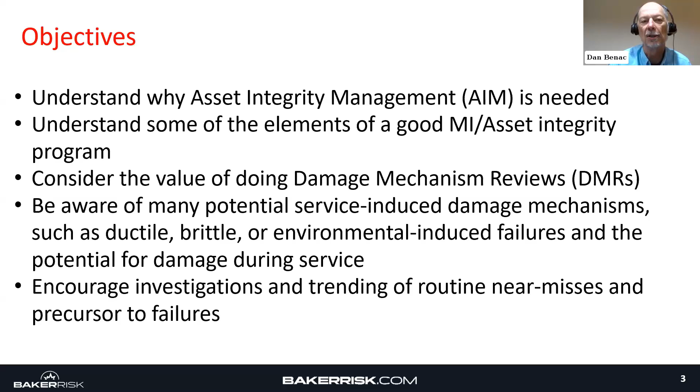We want to discuss specifically some of the elements of a good mechanical integrity or asset integrity program. We've decided to talk about damage mechanism reviews. Both Mike and I have been involved in that, and we think that's an important part of a good asset integrity program. Related to that, we're going to talk at a high level about some of the potential damage mechanisms that could limit the lifetime of your equipment, which you're very concerned about. And then we want to propose a best practice that we have observed from some of our customers that we work with on looking at investigations.

So those are our objectives, but here again is some of the outline of what we will be discussing. We'll talk about the importance again, who your presenters are, a case history to whet our appetite, and do some comparing and contrasting of PSM, process safety management, mechanical integrity, and an asset integrity program.

And those key elements of that, as I mentioned, damage mechanism reviews. Some of you may have been familiar with that. We want to share what we consider a shining star of an application of an asset integrity program that we have been leading for 3 years now globally, and that is for the ammonia and fertilizer joint industry program. Mike's going to go into the importance of inspection programs, because that's something dear to his heart. And then, as I mentioned, we'll talk about a best practice about trending near misses and failures.

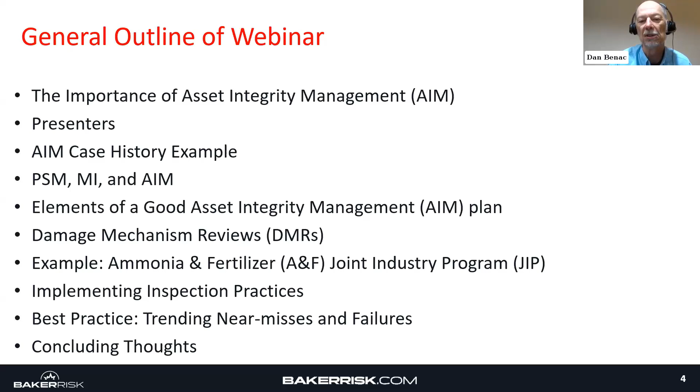A little bit about myself. From the video, you might recognize that I'm not a young engineer anymore. I have over 40 years of experience working in many industries. Started my career actually working in the refining industry, working onshore, offshore, in the plant. Cut my teeth on doing investigations for refineries and for production facilities, been in the North Sea. Through those experiences, I have become a subject matter expert in the area of corrosion and materials evaluation.

I'm a certified fire and explosion investigator, as well as a professional engineer. Have worked around the world dealing with mechanical integrity issues abroad, because things do happen, and we as a company have been sought out for that, and I've been honored to participate in that, and have been involved in many committee works, and again, I'm the subject matter expert for the ammonia and fertilizer joint industry program. That's just a little bit about me. I also oversee our materials lab here in San Antonio, Texas, and have a great group of experts that I work with. So now, Mike, why don't you introduce yourself?

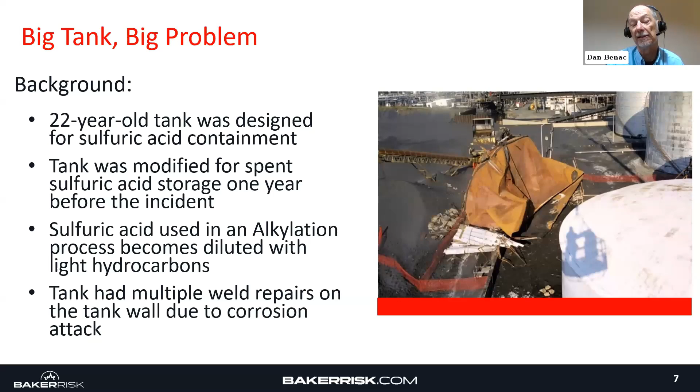In addition, multiple repair welds had been done, not only at the base of the tank, but also on the side and even on the roof of the tank. On the day of this particular incident, inert gas was flowing in the tank because there was some repair work going on in the vicinity.

This is a very large tank farm. You can see in this picture some of the other tanks. There were actually 6 tanks in this tank farm. So there was hot work activity going on above this particular tank.

And the failed tank was connected to another tank. That's important because there was natural flow that had occurred allowing air to go into this particular sulfuric acid tank, unbeknownst to the hot workers at the time.

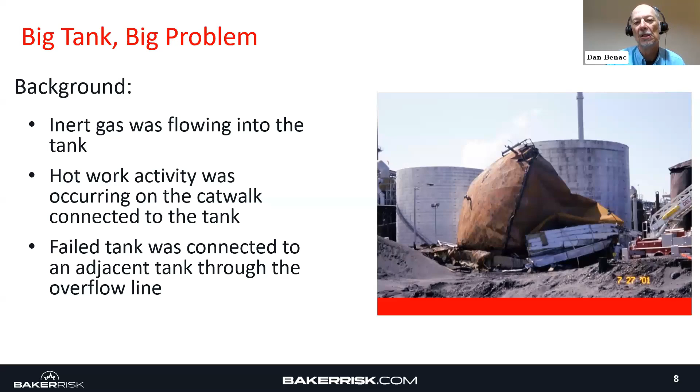As they were doing work, unfortunately, a very tragic fatal situation occurred where an explosion, what we would call a deflagration, occurred inside the tank, rattled the tank, and literally lifted this tank off its base into the air and threw it on its side. This was a view I actually took from a lift, photographing this particular tank.

What we determined in our investigation, a very complex investigation that took many years before it finally all settled, but at a very high level, air had entered into the tank. You had spent sulfuric acid, so hydrocarbon vapors were present. And in this vapor space, there was a fuel-air mixture.

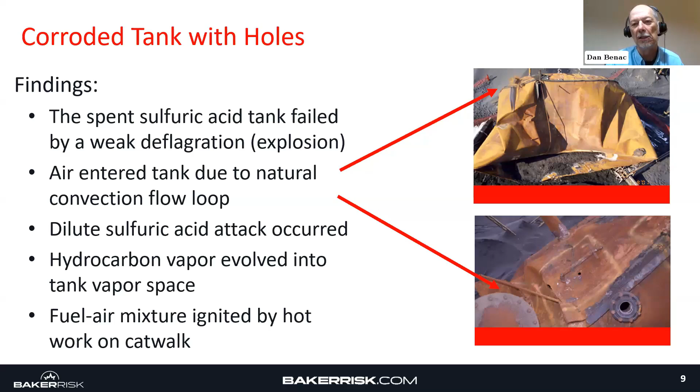A spark from the hot work had thrown itself into the tank because there were holes on top of this tank. Not only were there holes on top, but as I mentioned, you can see in the lower picture some of those holes that were on top of the tank. So it was just a spark basically that got in there, and it caused that failure to occur.

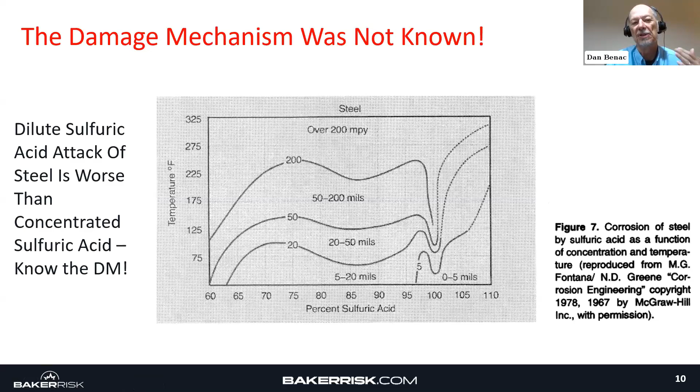So the reality of the situation is this tank actually had rainwater get in there, and the sulfuric acid became more diluted than concentrated, and therefore the corrosion rate was much higher. That was a contributor to some of the observed corrosion. The point being, you have to understand potential damage mechanisms to fully prevent something from happening.

So at a very high level, here are a few things you could call lessons learned related to asset integrity considerations. One, this tank was designed for sulfuric acid, not for spent sulfuric acid. Therefore, it was not a frangible roof design. What that means is a frangible roof will intentionally fail if the pressures get too high.

Well, the pressures did get high, but because the roof was a solid, non-frangible design, it basically lifted the tank off the ground. Otherwise, the tank would have just failed at the top.

This particular tank did not have a robust integrity program, obvious from the corrosion that was evident. There were inspections that were done, but they were inadequate because of corrosion that actually occurred under insulation. Many of you are probably familiar with CUI, corrosion under insulation. As I mentioned, the damage mechanism of diluted sulfuric acid was not fully understood. And although they had a purge system, the purge was inadequate. So you could say, well, I checked that box, we purged it.

Well, the purge was not adequate, obviously, because it lit off and it was in the flammable range. In the hot work, although there were hot work orders that were signed off, they were not fully adhered to, and some of the dangerous situations were not fully accounted for.

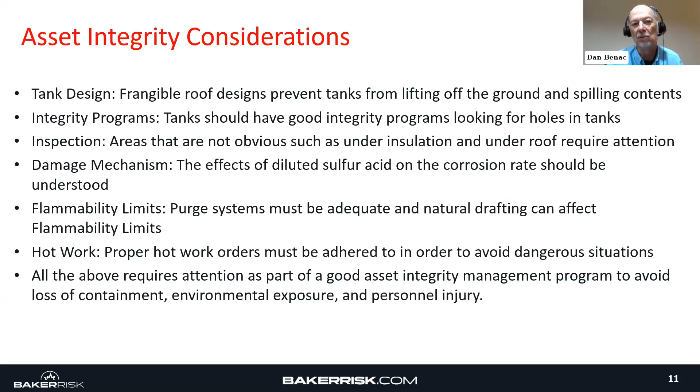So just as an example of a storage tank, although there are many, many things that could have been addressed, it just reinforces the necessity of having a good asset integrity program.

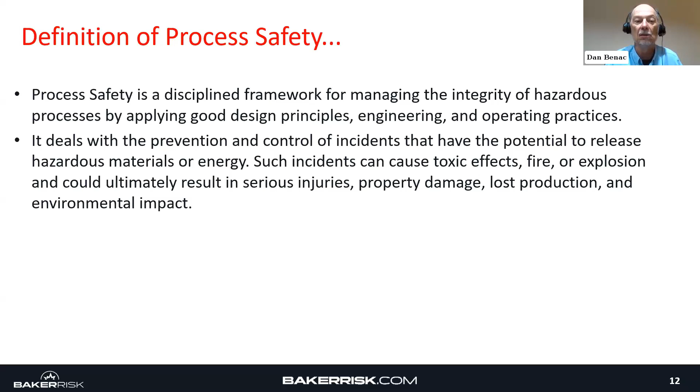Many of you here on this webinar have a process safety background, and just to put us all on the same page, it's a disciplined framework of looking at the hazards and applying good designs, good engineering practices, and operating practices, to minimize the hazards that can occur with toxics, fires, explosions, potential injuries, and also the loss of production, which is very costly to many of us.

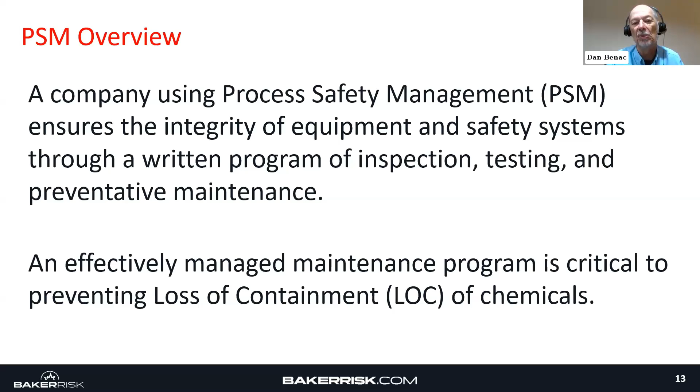It could be a pipe, it could be a vessel, it could be anything, but you want to keep the chemicals basically in your pipe, in your asset. And so that's why you do your asset integrity. It's to have those procedures, to have those controls. We want to keep the contents in the pipe and keep it under control at all times.

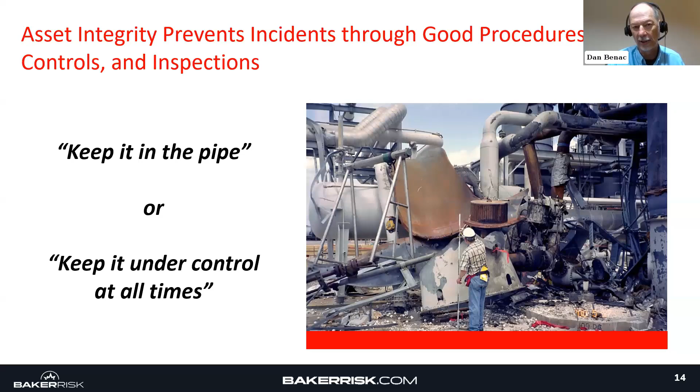What you're seeing is another incident that our team was involved with a few years back, a brittle catastrophic failure. Unfortunately, catastrophic failures like brittle failures have very little warning. And therefore that's why you have to have a good asset integrity program to know what scenarios might cause a brittle fracture. In this particular case, there was a weld that was performed that was a poor quality weld, and under operating conditions of less than a day of operating, it catastrophically failed. So an asset integrity program would be controlling that.

Just to show you some statistics, mechanical failures, if you look at this pie chart, you'll see that a lot of your failures are predominantly, like over 50%, are due to mechanical failures or operation related. In fact, another survey stated that 50% of major losses of containment were primarily due to aging of equipment, due to either erosion, corrosion, or fatigue.

And I would agree with that, having worked with many of the damage mechanisms that can cause concerns, such as fatigue, cyclic loading, higher temperature exposures, corrosion, and sometimes velocity effects. These are all things that are taken into account.

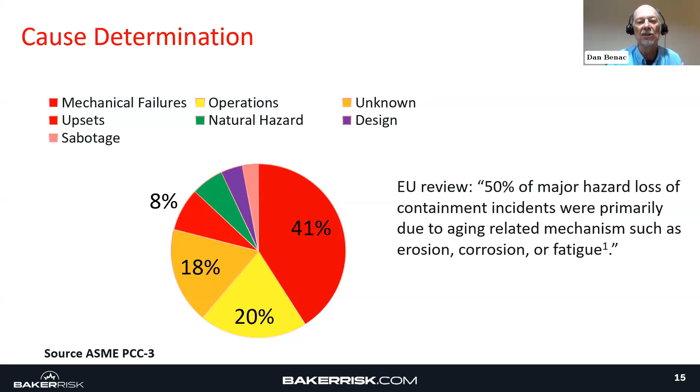Well, in the process safety regulations, both in the UK, in the United States, and now even in Egypt, there are standards and guidelines that are put out there. And those have come because of incidents that have occurred worldwide. It all kind of started in the UK and in the United States in the late 80s, early 90s because of incidents. OSHA in the States created a law referred to as 1910.119.

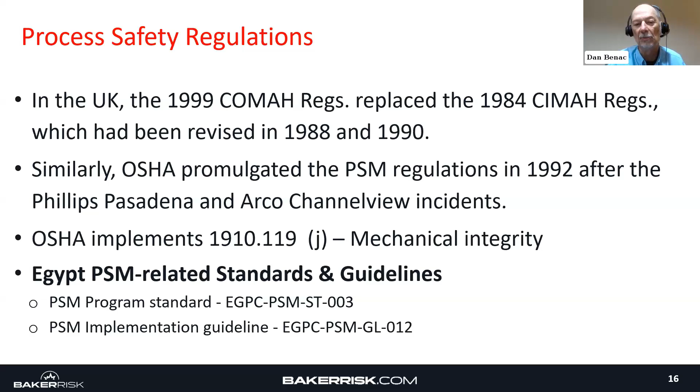Under that was mechanical integrity. And I'm aware and have seen some of the Egypt PSM related standards and guidelines shown here that you are looking at, considering, and trying to implement in some of your plants. So there are the original 1910 elements, which included these 14 elements.

Many of these, in fact, if you think about the incident I just talked about, there were several of those that were not adequate. One, there was a management of change - they changed the tank to a different service. Contractors working had a hot work permit, but it wasn't adequate. Training was an issue. The integrity of the tank, the emergency response, was a factor when the incident occurred. So you can see how all of these things really do play into a good asset integrity program.

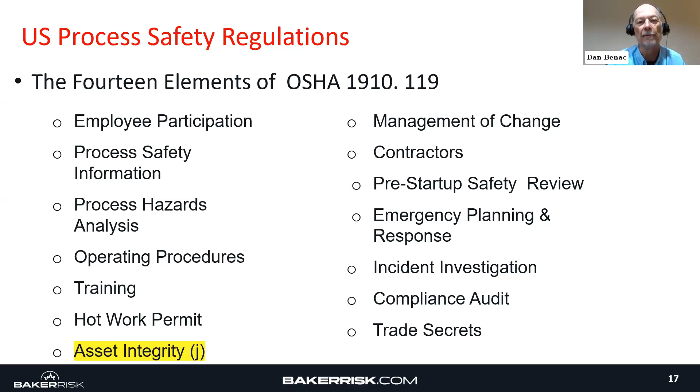Just to emphasize the importance of that in the United States, and this may be a little bit older data, but the important point here is that in the United States it's been recognized that often some of the issues of citations, which means there's been some violation of a procedure, written procedure, training, inspection, or equipment deficiency.

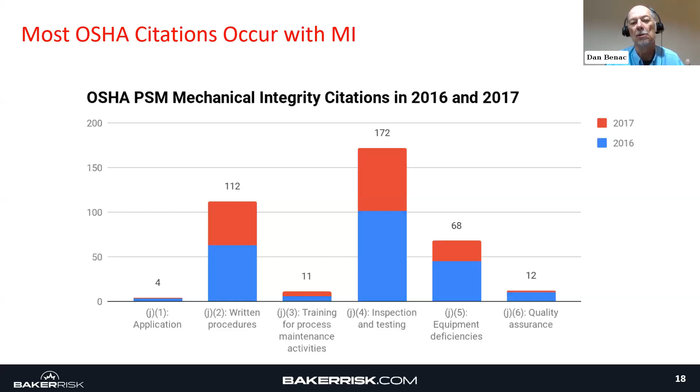A lot of those are citations that go to companies within the US to say you need to do much better, and you will be fined accordingly.

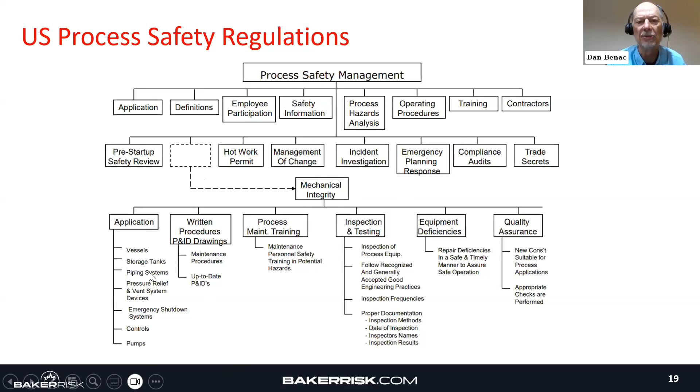This flow diagram might be a little bit busy, but what I want you to see, as I bring my cursor, is this mechanical integrity. Under that are many elements, and that's what we're talking about today. We're not talking about all these others that are important, but we're going to talk about written procedures, inspection programs, some equipment deficiencies, and the applications of those to different types of equipment. Mike will be addressing some of that.

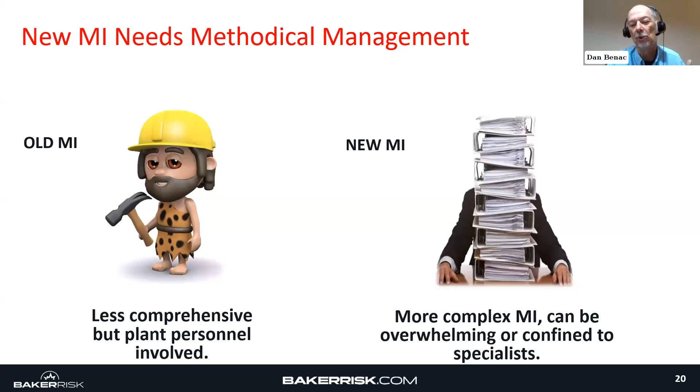Well, if you think about mechanical integrity, it could be kind of overwhelming. I think in earlier days it was probably less comprehensive, not as organized, not as documented. And so now you have all this documentation, which can be overwhelming. But it's very important, and it's very important that that information is passed on to the people who really implement that in your plants. There are many tools out there.

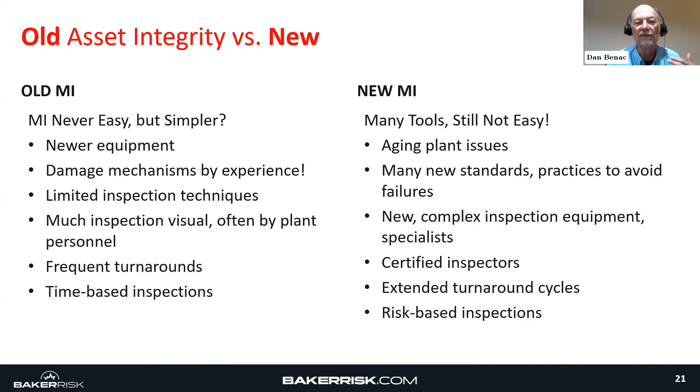It might seem complex, but the main thing is to continue to move forward: looking at your equipment, having the right certified inspectors, doing risk-based inspections. That's more of a newer approach, looking at the higher risk issues rather than just doing fixed equipment inspections. But these are all things that are very important.

Just to build on OSHA, what was also developed is risk-based process safety, which took it to the next level. What that is, is looking more at the hazards and the risks, recognizing that not all hazards and risks are the same. So often when a risk-based approach is taken, it's looking at all the potential hazards and risks, but then prioritizing those risks that could be the greatest hazard or the greatest potential risk for loss of containment.

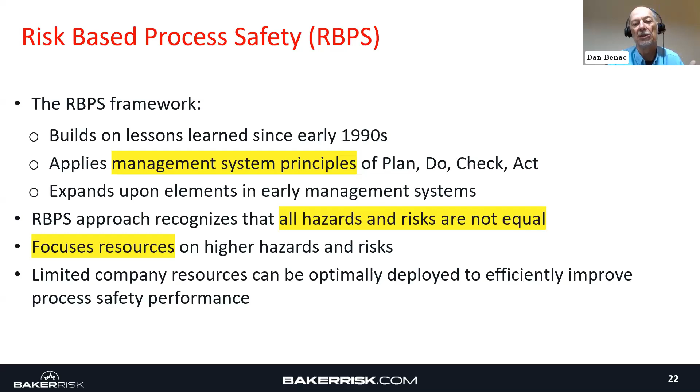And the focus, therefore—because many of you recognize you cannot do everything in a turnaround—you begin to focus on those that are higher. And so it becomes a prioritization methodology, just so you can accomplish those higher risks and use your resources to the best ability.

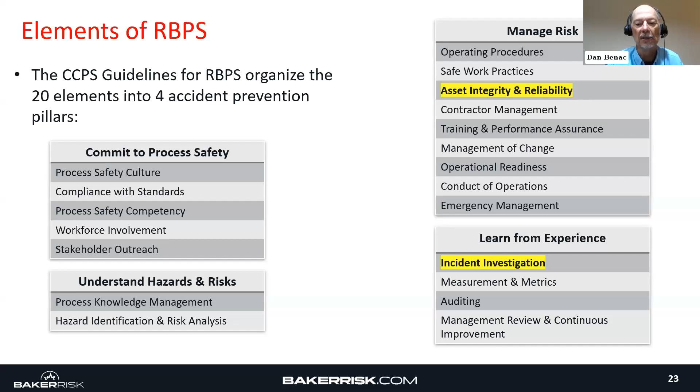So the CCPS, or the risk-based process safety approach, expanded that into four, what they often refer to as pillars, and 20 elements, as you can see here in this listing. The pillars would be: a commitment to your process safety, understanding the hazards and risks, and managing the risk—which is that aspect of asset integrity that is part of that. And then learning from experience. I've highlighted asset integrity and learning from experience under incident investigations, because later we're going to talk about a best practice related to investigating those things that occur in your plants.

Again, now let's focus on the asset integrity, often referred to as AIM. Again, we are looking at your equipment—it could be fixed equipment, it could be rotating equipment, it could even be controls of some of your equipment. But all of that is important to the operation of your plant, and therefore that all fits under your asset integrity program. Early in my career, probably about 20 years ago, I was part of a team that went to...

...the North Sea to look at the asset integrity of multiple programs in place for offshore platforms. It was there that it became very evident of the necessity of that, because of the hazards of offshore platforms, environments, and the corrosion and operations. And so that also applies to our land-based resources and assets too.

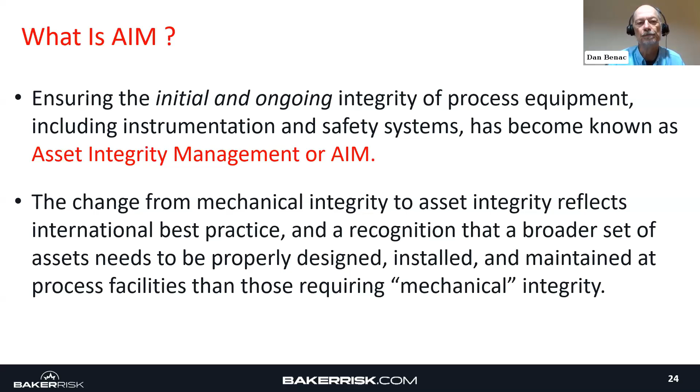So when we're talking about managing risk, integrity, and reliability, we're talking about the design, the installation, and all the activities that ensure keeping the equipment fit for its purpose until the retirement point occurs. Now, we will make a note—at least here in the States, there's a lot of aging equipment.

And it's that aging equipment that presents some challenges, because often equipment may have been designed for 20 or 30 years, and it's actually being used for 40 years. So you have to do those assessments if you're having that old equipment. That does not mean new equipment should not be inspected or part of your program, but the greater risk is with your aging equipment.

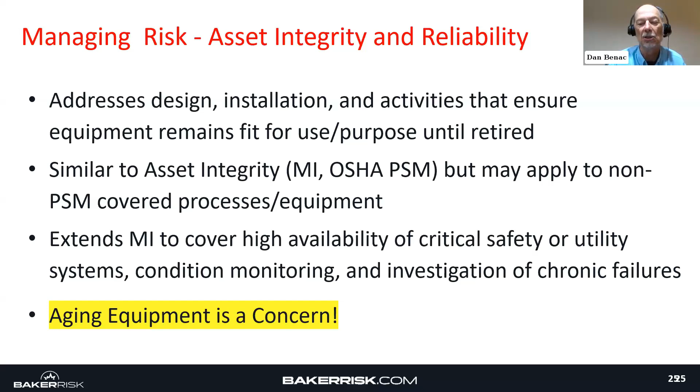We're probably a little bit partial, but we believe mechanical integrity is one of the largest and most important elements of your PSM program, and may even be one of the more expensive ones because of having to put resources into doing those inspections.

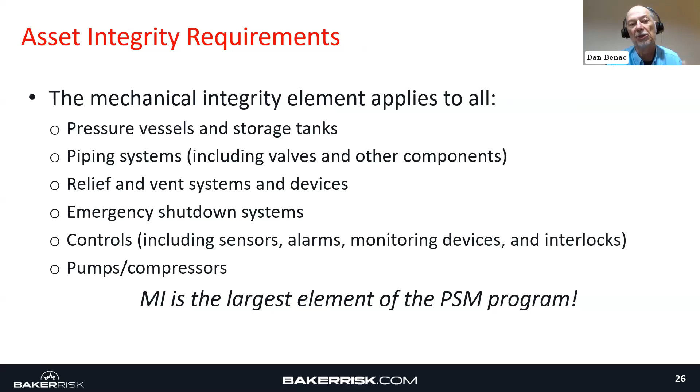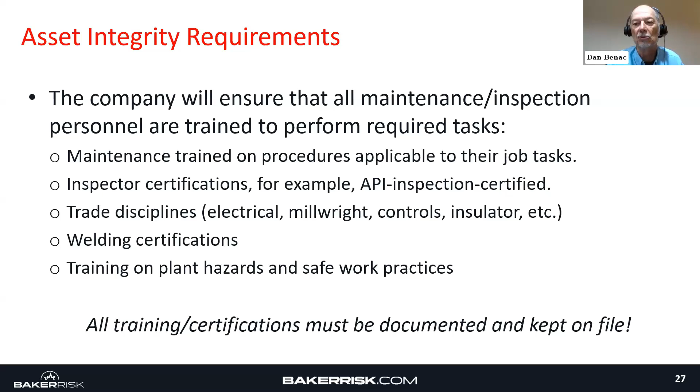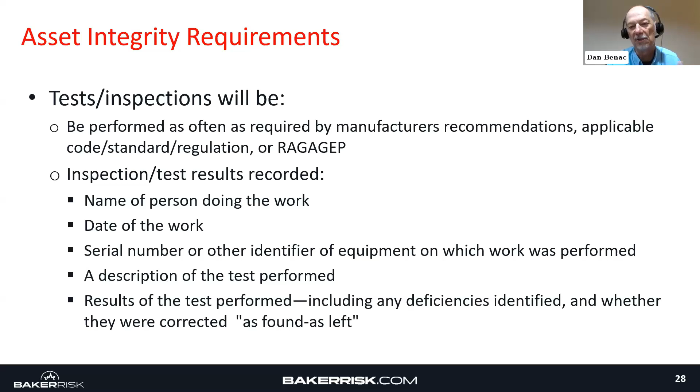Related to testing and inspections, Mike's going to address this further, but it's critical that you have a plan in place, you're meeting the codes and standards and recommended best engineering practices, and you're tracking all of your equipment, so you can point to that heat exchanger or vessel and say: we know when it was inspected, what it was inspected for, and that the person was certified, and therefore we found some deficiencies, and this is the action we took.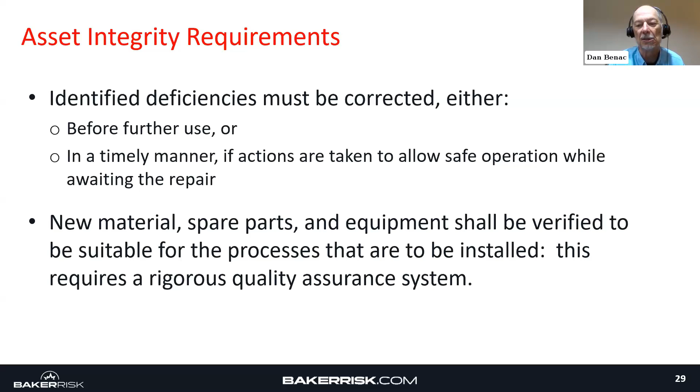Concerning deficiencies, this is a big deal, because if you're going to inspect equipment, you are going to find things. The challenge you face is whether you can address those in a timely manner, for the purposes of allowing safe operations to occur, and whether you have the necessary spare parts or new materials. Like the example I shared earlier, a vessel had a repair that was inadequate, and it resulted in a brittle fracture. So deficiencies have to be addressed in a very appropriate way.

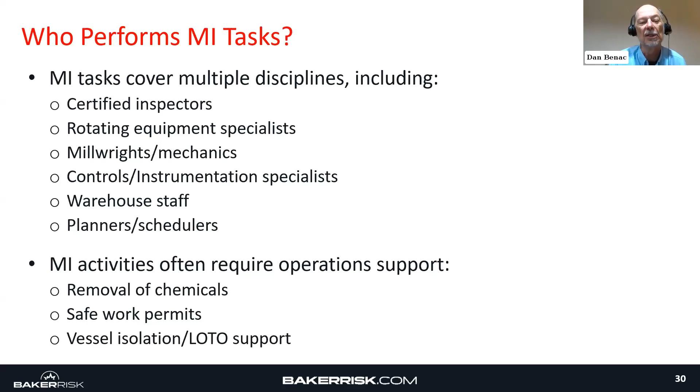There are many people involved in a mechanical integrity program. It starts from the top, from your plant manager or PSM lead, but the implementation goes down through your staff, to the operators, the inspectors, the millwrights, even some of your warehouse staff. Everyone needs to buy into your mechanical integrity program.

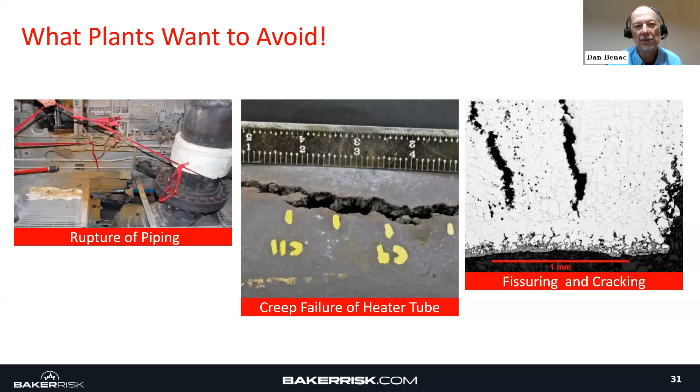I put up some of these pictures because these are things we've seen happen. On the far left, a failure occurred in a stainless steel pipe in a nitric acid plant that resulted in the pipe launching through the roof. Or you have a creep failure of a heater tube, or maybe a radiant tube, or a platformer - those are high temperature issues. And you might even have high temperature hydrogen attack, where you get fissuring or cracking, as shown on the far right.

These are all things that can happen, and can be avoided. As we think about those failure mechanisms, what we're really talking about is whether you have the right controls in place to manage your risk. A good asset integrity program will know the likelihood of failure and the hazard or consequences of failure, so the objective of your program is to control and manage those risks to prevent those things from happening. My experience has been that it's often the unknown that gets us, because we're either not informed or we don't understand all the implications of what could happen.

But once we understand those drivers for mechanisms that can degrade our equipment, we can inspect for it and reduce the risk. That leads into the next topic, which Mike is now going to take over. Thanks, Dan.

We've gone through a lot of the results of not having a comprehensive asset integrity management program. Dan showed you some of the failures that occurred, and we're going to try to show you now tools that will help you address that.

We just saw the 5x5 risk scenario - I think either a 5x5 or 6x6 matrix is the key and cornerstone of most mechanical integrity programs. Those who operate in the high red region are subject to more incidents than those who operate in the lower left-hand corner, in the green region, which means you're basically in a controllable area where your likelihood is low, and if there is a failure, your consequence is low. You want to try to live in the green area, not the red area.

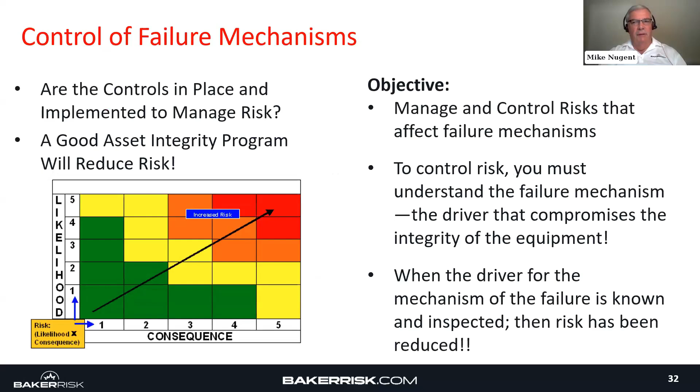A few ways to start doing this. The cornerstone, I believe, of an asset integrity program for fixed equipment is a damage mechanism review.

These are the foundation of the asset integrity plans. They try to go through equipment in a systematic program for addressing life-limiting and compromising damage mechanisms, both unaddressed and known with the equipment, and hopefully you'll look to see what unaddressed or unknown damage mechanisms may have occurred in other similar units, either at your facility or other facilities, that can cause a loss in production.

I've been fortunate enough to work in plants, as Dan had mentioned, aging equipment. The refinery I spent 25 years working in was built in 1908, so obviously we still had some equipment in service since then. Some of the utilities, I think the oldest vessel I worked on was from 1932. Some of the fixed equipment was there, so at that time the equipment was well over 80 years old.

Having said that, in the utility industry I worked in New York City, we had operating equipment still in service from 1888. So again, the refinery I worked in was relatively young compared to the utility, where we had wooden gas pipes and copper steam pipes. All those are still in service. We try to remove them.

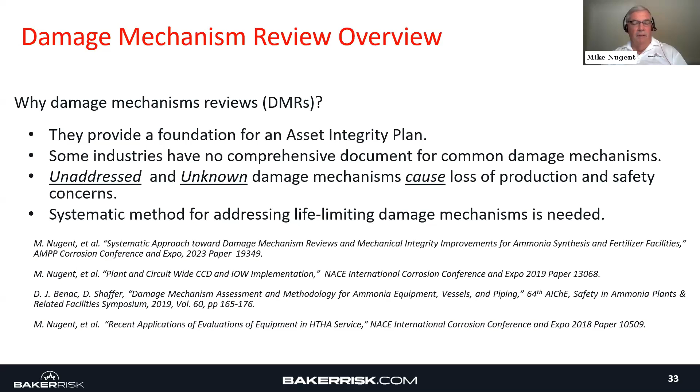Specifically, I've been involved for the last 10 years in applications for prevention of HTHA failures and the implementation of new methodologies for non-destructive testing of HTHA. I was the program manager and lead engineer on a major international program that has effectively changed the inspection modalities and has led to new life prediction on HTHA. So again, those papers are all available.

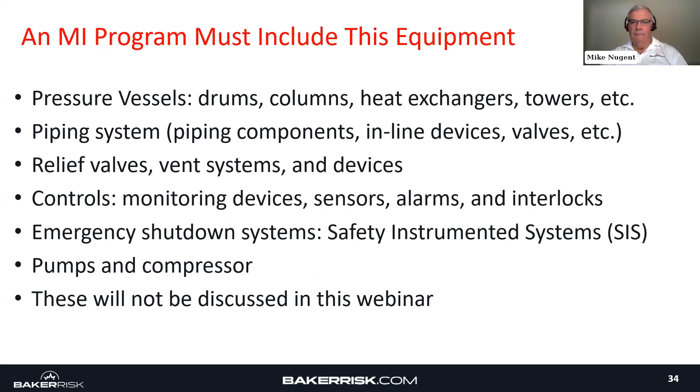A mechanical integrity program must include pressure vessels, piping, relief valves, controls, the emergency shutdown systems, also known as safety instrumented systems, and pumps and compressors. We'll mainly be handling the fixed equipment and the piping in this one.

There are numerous damage mechanisms. These are just some of the ones in corrosion that you may encounter in your plants. Overall, the American Petroleum Institute API 571 has a list of damage mechanisms that I've been both an editor and am an active contributor to that document, which is in its third revision right now. There's over 75, possibly 80 now, specific damage mechanisms on corrosion and mechanical situations. We go through those in a very shortened version of what they are, what materials they affect, and how you could effectively mitigate or inspect for them.

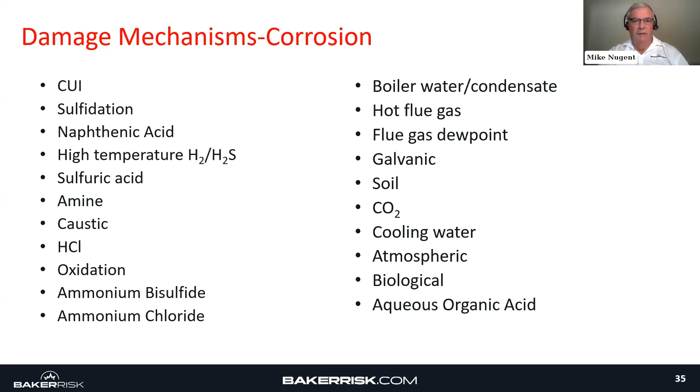They're way too numerous to go into, but needless to say, you need a subject matter expert, which I would consider myself one of those, to go through and see how these damage mechanisms may apply to your specific equipment and where they may evident themselves.

We walk through the plant and we see those, and a way to further drill down on that would be how you go about implementing a proactive mechanical integrity program. Usually includes a risk-based inspection review and a risk-based inspection program. You have a procedure manual, you'll collect your safety information, you conduct your damage corrosion analysis for each unit, which usually involves thousands, if not millions, of TMLs, which are thickness monitoring locations. Sometimes they're called CMLs, corrosion monitoring locations. And what we try to do is break them down into a systemization and circuitization that we'll talk about soon.

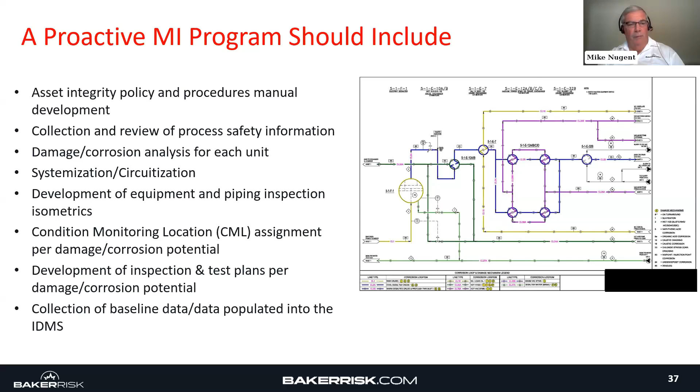We'll collect the data and put it into an IDMS, an inspection data management system. The system and circuitization is key to not overdoing it, and to properly capture the damage mechanisms in a specific circuit or system.

What I've tried to do in my implementations, which I've done probably over 75 different risk-based implementations and updating, or what we call evergreening, is divide it into appropriate systems, interconnecting piping subject to the same set of conditions and process service parameters, and then we circuitize these.

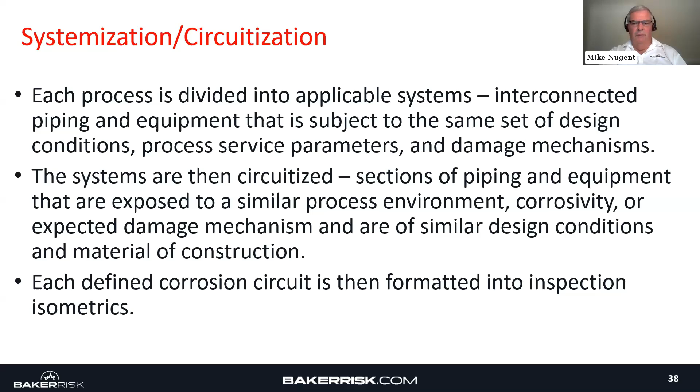These are sections of piping exposed to similar process conditions, corrodants, and expected damage mechanisms. They have the same kind of external coating and/or insulation, or lack of insulation. Each circuit is defined as a corrosion circuit and formatted for inspection isometrics. We'll see an example on the next slide.

Oh no, sorry, I missed one of these slides. It's confused up - this is an IOW slide that somehow got put in here. I should have caught that earlier. So this is an IOW slide that we'll be talking about later.

As an output of this inspection process, there's an integrity operating window where established limits are set for variables that can, when exceeded, affect the integrity of the equipment. Again, this is a little bit out of place, but I'll catch up here. The integrity operating window tells you that given a set of operating parameters, you've exceeded a parameter that causes damage or causes corrosion or degradation in the material. There are a few different kinds of standard IOWs.

One can be a critical IOW, which usually requires an alarm to the operator. A standard IOW may have an alarm associated with it. Informational IOWs usually have an email alert or non-alarm communication. Right now, the screen shows some limitations we have based upon the equipment number. It goes through the service, the materials of construction, and lists the damage mechanisms we're considering in the specific circuit to control our accumulation of damage from that specific damage mechanism.

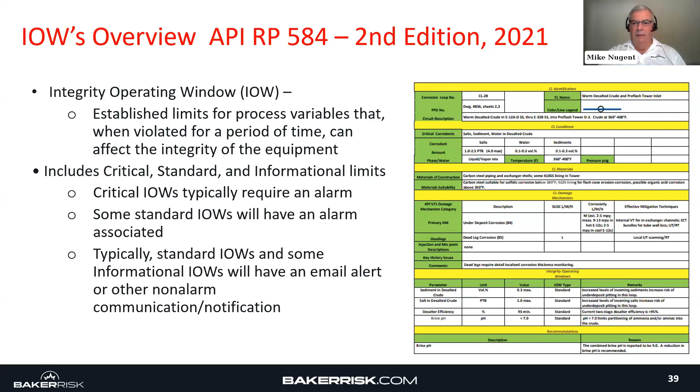More on IOWs: a successful IOW program is a communication tool that allows proper communication between process operations and mechanical integrity personnel. The frequency and urgency of the communication is based upon the severity of the IOW. A critical IOW prompts an alarm, so you should have an immediate reaction to tell the operator they need to take action to prevent further damage.

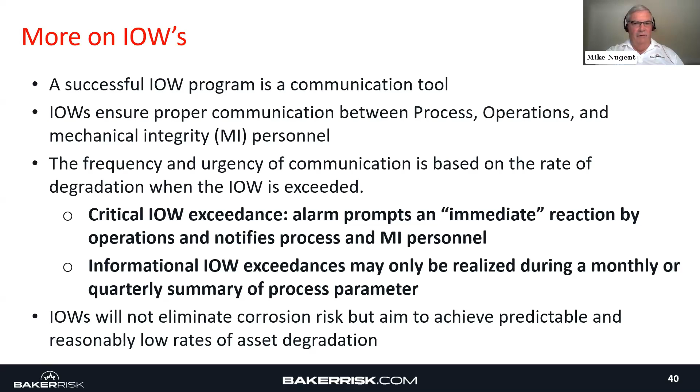Information IOW exceedances may only be realized during a quarterly summary, when you get together with process, mechanical integrity, and inspection folks to decide what areas need more attention in the forthcoming quarter, or what areas may be relaxed a little to focus on other areas of high risk. IOWs do not eliminate risk, but they try to minimize the amount of risk and push you down to the green areas.

There's a corrosion control document, also another output of the API methodology on risk-based inspection. The corrosion control document is a repository summarizing the unit's process descriptions and its corrosion circuits.

This is kind of the culmination of the systemization and circuitization that we kind of skipped over here, but it allows you to combine that with the key corrosion elements, how many mils per year or millimeters per year you're going through.

The IOW, in theory, the CCD contains the IOWs, lets you know what the high-low levels are, and the CCD is an essential part of risk-based inspection planning. It's covered in API 970, the corrosion control document.

I'm going to digress a little bit. One of the key points of this is, from my experience, I worked in one refinery right outside of the New York City area. The 25 years I spent in that refinery, I worked for 5 different companies. I never changed an office, but I worked for 5 different companies.

Each of them had their own kind of management style, and some of those we had good people who came and left. What happens is, if you have a systematic program, such as API has documented with the RBI, the IOW, the corrosion control, regardless of what company rolls in, you have a congruency, a steadfastness, fixity of purpose of your inspection program.

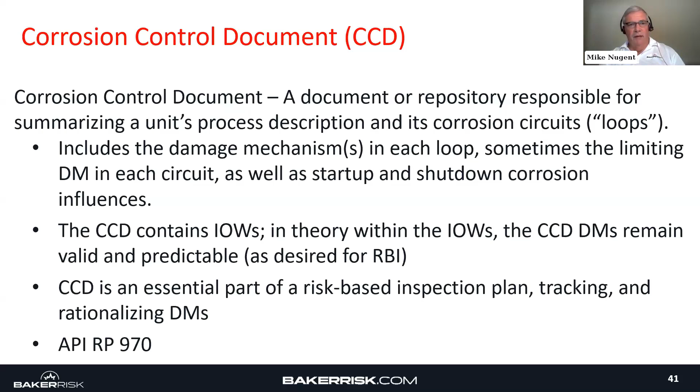That allows you to carry through different corporations taking them over. Again, that refinery had equipment going back over 100 years, and we found that relying on what we call tribal knowledge, or the history of people working there, may not be that effective because of the large turnover you have in companies. So we feel that implementing programs such as risk-based inspection, CCD, and IOWs are very effective to try to bridge that gap between transfer of knowledge, and also looking to try to automate this information.

The CCD IOW work process: we start with the process flow diagram, the corrosion loop diagram, where we define the corrosion loops based upon temperature and pressure changes, corrodents, and other factors. We populate each loop, and we go through the process description, equipment of concern. The corrosion engineer will assign the relevant damage mechanisms to each corrosion loop with his rationalization for inspection and mitigation response.

We try to list the key IOWs that I showed you earlier, in that picture that we had associated there of a page of IOWs, and we try to maintain that we may not control the corrosion, but at least we're aware of it and its accumulation as we operate our units. Through that, we have key inspection and operation recommendations and concerns that we have.

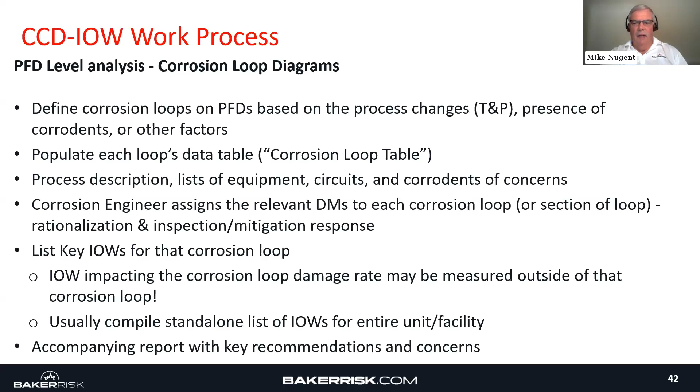The next slide should show a picture of a crude unit. This is the basic unit of a refinery. Again, this kind of looks a lot like the ammonia unit that we had shown earlier with the damage mechanism sticking through there. Here's a damage mechanism review, which is what we start out with, and there's about 20 in a crude unit.

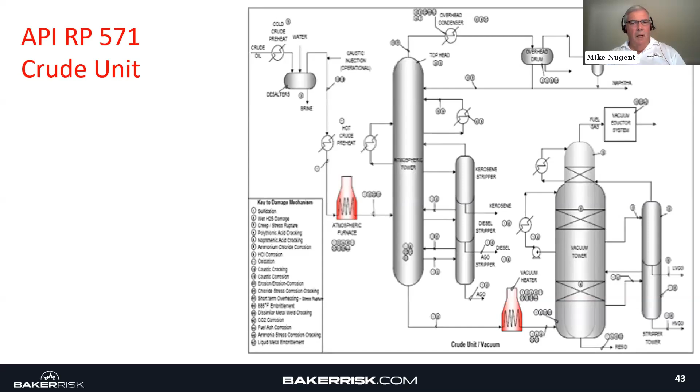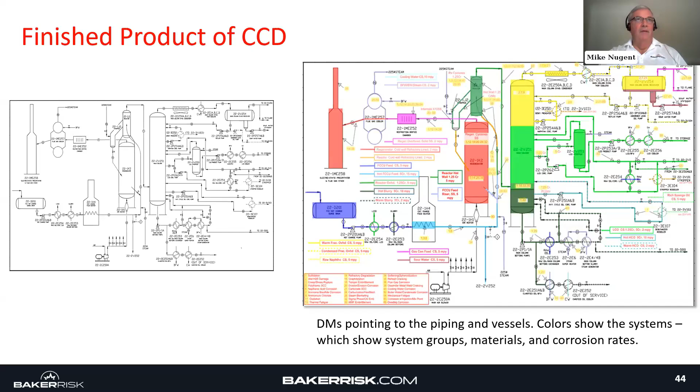For this particular process flow diagram of probably maybe 6 or 8 different pieces of equipment, your CCD may be comprised of maybe 10 or 15 diagrams like this. This is the desired output of a CCD, which incorporates a damage mechanism review, the system and circuitization, the IOWs, and this is the finished product that can be used as a training tool or updated on a regular basis. So this is an ideal product where we're trying to get to.

From that, we look to develop inspection and testing plans. These are implemented using recognized and generally accepted good engineering practices, in addition to any specific PSM guidelines you may have.

Usually, ultrasonic thickness readings of each circuit of piping and equipment are used to determine corrosion rates and set the next inspection interval. We're trying to get away from time-based intervals, like taking readings every 5 or 10 years, and move into a risk-based prioritization of which circuits need more thickness readings and which need less.

Some of these thickness readings can now be automated. I was a principal in a company that developed automated UT thickness readings that could operate anywhere from low temperature up to 450 degrees C, applied permanently to take readings. You could take readings every second or every month, depending on the battery life you want to expend.

These give you continuous readings, the most accurate I've seen down to a 10,000th of an inch. These then need to be managed with inspection data management software. You'll know many of these, like Meridian, PCMS, and a whole bunch of others that can manage your data.

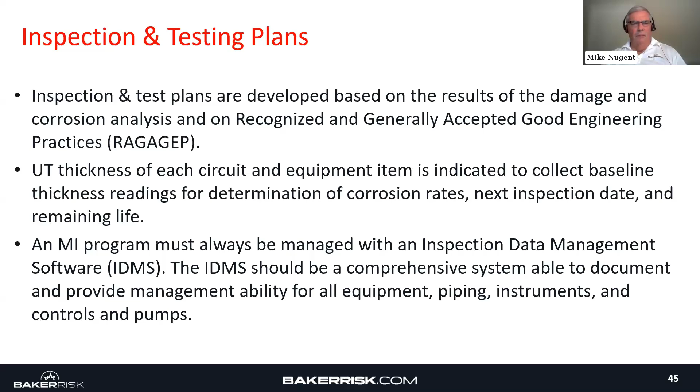However, if you don't have that, usually a semi-qualitative or semi-quantitative program is what people find, bringing in a subject matter expert to handle the tribal knowledge in addition to the analytical work that the tools present.

Some of the concerns in mechanical integrity programs: incidents continue, and not every consequence can be identified in an MI program.

Regarding PHAs and the treatment of MI issues, having been through hundreds of PHAs myself, I know we've probably spent 2 or 3 hours on mechanical integrity issues. Depending on who's implementing it and who's in the room, coverage can be spotty. So you really need a separate damage mechanism review, usually prior to a PHA, so you can bring your key concerns into that PHA in the limited time they have to cover mechanical integrity.

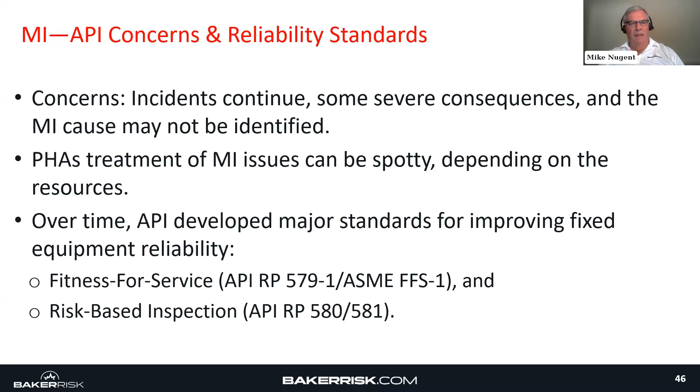As we've discussed over time, API has developed standards for improving equipment reliability, both in fitness for service, which is the 579 series, adopted by ASME as FFS1, and also risk-based inspection, which I mentioned earlier, quantitative and qualitative. That's the key for implementing a mechanical integrity program that can be managed and becomes transferable to the next person.

Here's a summary of the DMRs, IOWs, and CCDs necessary for an asset integrity program. 571 is the damage mechanism, which I consider the key cornerstone for mapping, finding the right areas, and monitoring them in a practical, judicious, economical approach of equipment management.

You take those and put them into the IOW CCD program, which starts developing integrity operating windows to help effectively monitor the standard operating procedures of the IOWs, allowing damage to accumulate in a controllable fashion. Then you roll all those into a corrosion control document, which is a very comprehensive program if well implemented for a refinery or chemical plant.

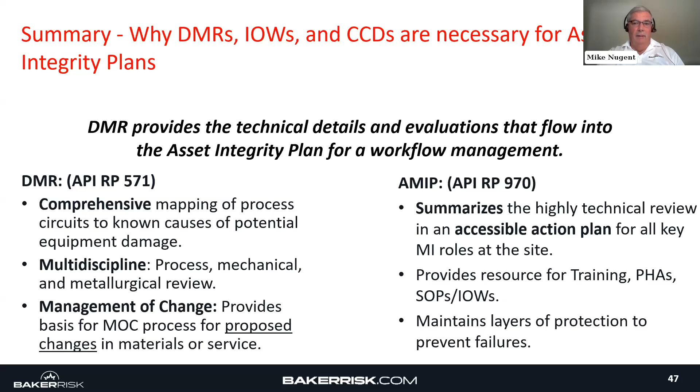Understanding the damage mechanism is the foundation for plant reliability and safety, as I've said a few times already. It's the basis for action to minimize and prevent damage mechanisms. Inspection planning needs to be effectively implemented.

Too much inspection means you're spending too much time just entering thickness data, as opposed to looking at the effects of that thickness data. I know some refineries in the United States had over 3 million TMLs, which is a major project in itself just to try to complete those 3 million TMLs in a yearly or bi-yearly process.

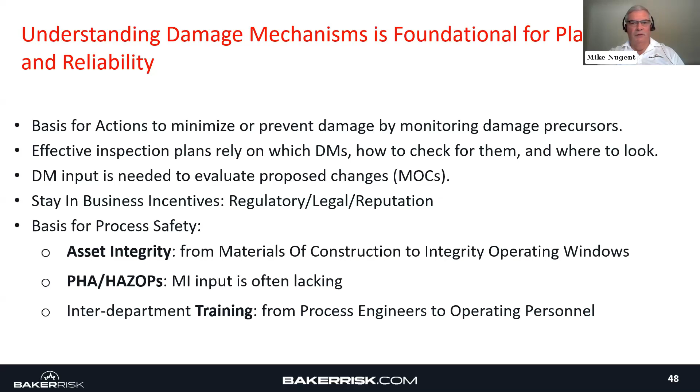Rather than taking thickness readings, you need to be looking at what's going on with my damage mechanism sites in the key locations. You also need to stay within the guidelines of your regulatory business incentives, of legal, what you need to prevent loss of containment. And the basis for process safety is asset integrity, looking at your material construction review, HAZOPs, and then use those CCDs as training for your process engineers and operating personnel to effectively learn the history and what they need to be concerned with as they're operating their unit to maximize the quality and the quantity of product that they're producing.

I'll turn it back over to Dan right now, and he'll go over some of this specifically applied to an ammonia and fertilizer program that BakerRisk is very proudly the steward and the mentor of.

Well, thank you, Mike, for sharing some of your wealth of experience in your career as a subject matter expert in doing the things you have done. We wanted to share with you a real live example of an application of an asset integrity program, as we have been working with the ammonia and fertilizer industry right before COVID hit.

We have been very involved with the ammonia and fertilizer industry for many, many years. And prior to COVID, BakerRisk and some of our staff presented this as a suggestion. And therefore, what we did is exactly what we were talking about: identifying some of the damage mechanisms as well as mitigation options for equipment for the purpose of increasing reliability.

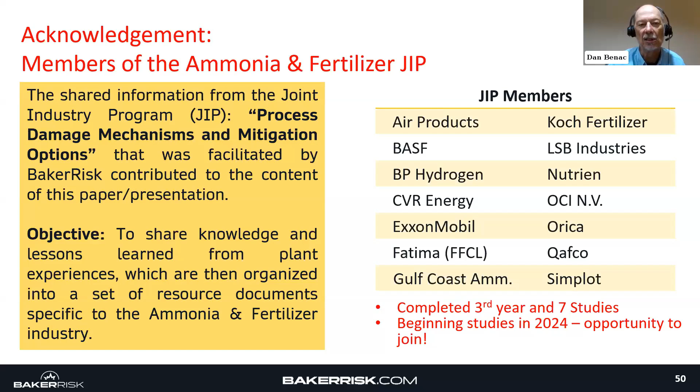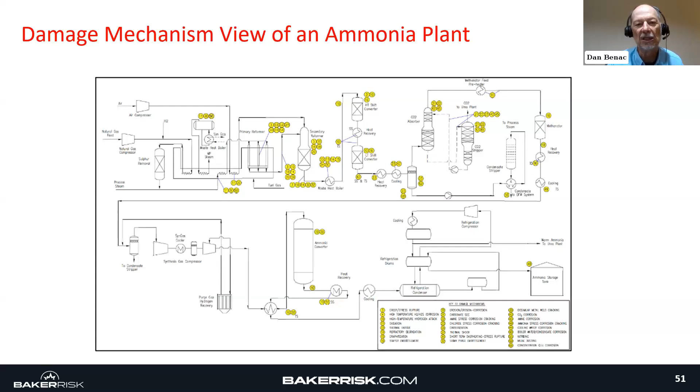The ammonia and fertilizer joint industry program has been one way where we've identified many damage mechanisms, as Mike referred to earlier, and some of the key processes, which include the ammonia process and storage tanks. We've also looked at the urea process, the ammonium nitrate process, and nitric acid. All of these have very distinct damage mechanisms and are important.

As an example of that, this is just an example of how we applied some of the things that we learned about a damage that occurred in a storage tank in 2011, where the reality of the situation is ammonia stress corrosion cracking is a known phenomenon that can occur. And the issues at hand with that are the ppm of oxygen and the amount of water.

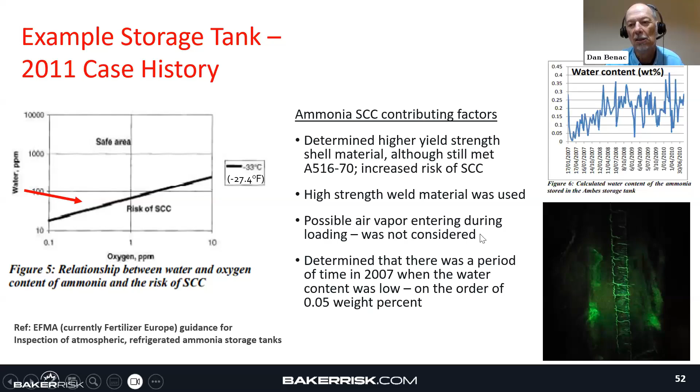So again, that's just an example of how the ammonia fertilizer JIP is taking real lessons learned and applying that. Our final point that we want to discuss with you is what we would call a best practice. We have been working with many companies around the world, and with that, this is a best practice that we have seen utilized by some, not necessarily all, and that is trending near misses or failures, often referred to as precursors.

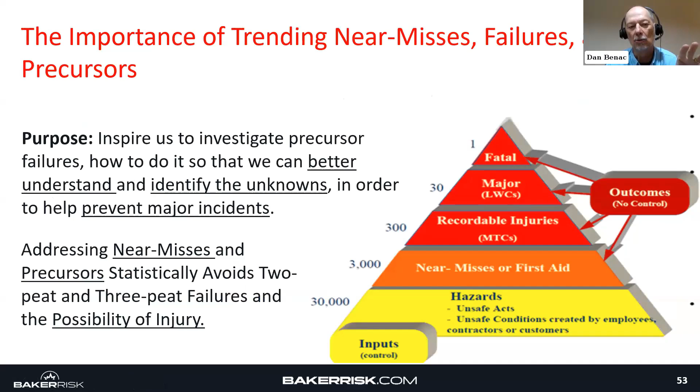So we're looking at the precursors, trying to trend those, and that's the emphasis, trending those and learning from those. The dilemma you will face is the fact that they can happen, and then there's a challenge of, well, do I really need to investigate?

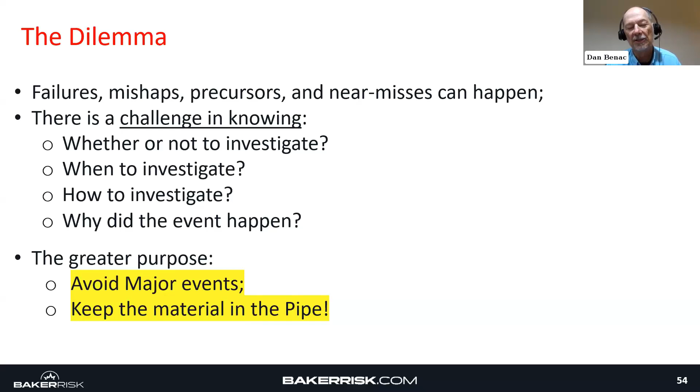It takes too much time, it costs too much money, or who's qualified to investigate? But the greater purpose, and I've seen this at companies, is management has recognized that to avoid that major incident, it is worth the investment to trend those potentially less severe minor incidences so that you can keep the material in the pipe.

A lot of the premise behind this is that almost always there's a less severe precursor before a major incident. There's always something, like the tank example, where the precursor was that the water content was low. That would be considered a failure of the monitoring system, in that it went down and wasn't addressed. You can prevent that as you identify those contributing and potential root causes.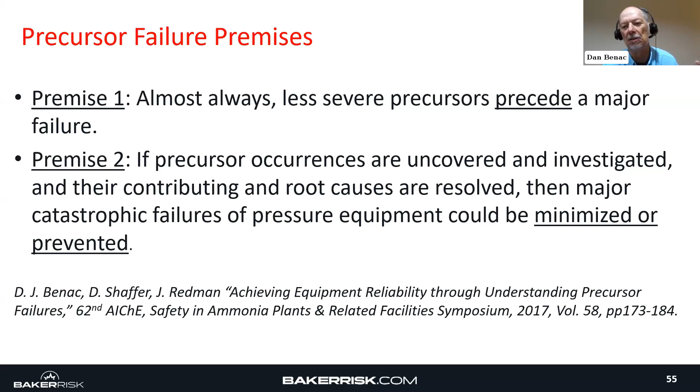This is an example of the paper that we presented, which is a good example of a best practice, and we can share that with you later on.

Back to the precursor mentality, or near miss: it's something that doesn't seem very significant, but in reality it could have been very close to being very significant, or possibly a close call, a near miss, a near hit.

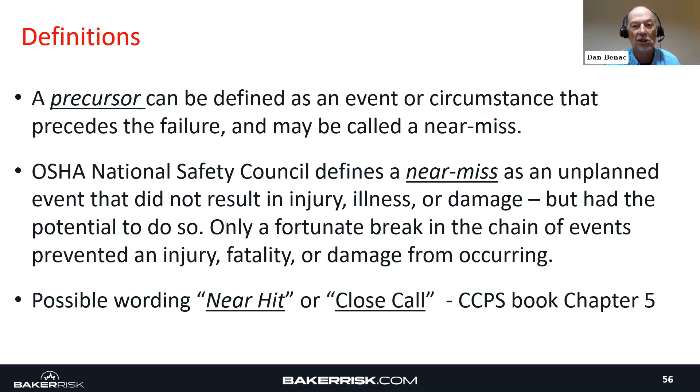We see that this is a best practice. We recognize this. We have seen that incidences have been avoided when this practice is adhered to.

Mike referred to API, the American Petroleum Institute. There's another recommended practice, 585, which we've had input into - we, meaning Baker Risk. The industry saw the need to do investigations systematically, and therefore it put this best practice out there to avoid a scene like you might see in this picture, which again we were involved with.

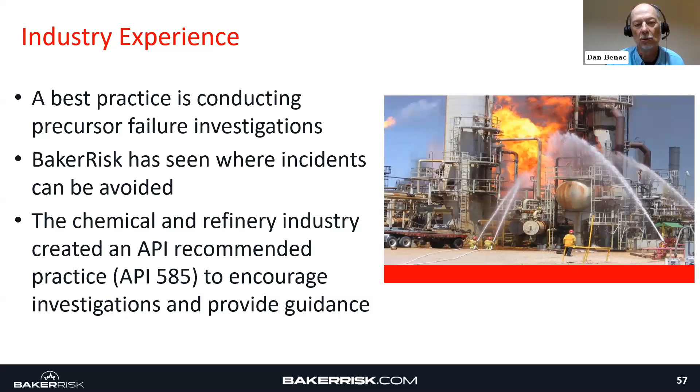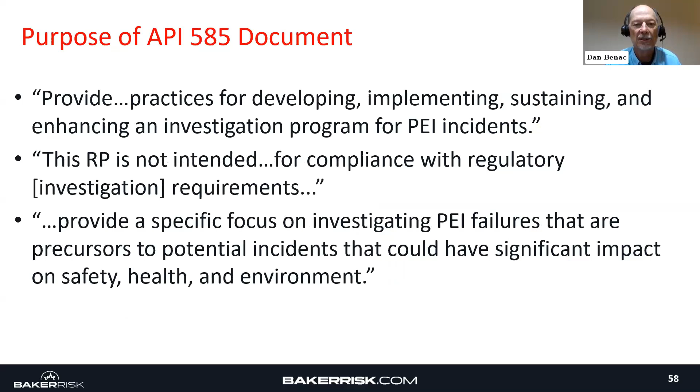If you do not have that resource as part of your investigation resources, I would highly encourage you to get it, and we can discuss that with you if you'd like. Part of that document is to look at your pressure equipment, often referred to as PEI, to avoid those issues, to make sure you're within your regulatory requirements, and also that you're operating very safely.

Excursions - what are some examples? You can have excursions of process parameters, like I mentioned with the water. You might have temperature excursions, pressure excursions, all kinds of things. You could have layers of protection fail that might be an indicator of something going on in your system, like a rupture disc corroding, which might indicate contamination in your process stream.

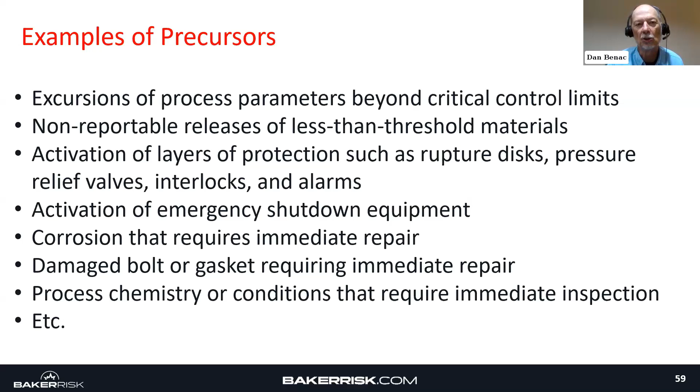So these are just a few suggestions of things that could be considered precursors. Precursors often are things that we're unaware of sometimes, and it requires good discipline to act on them.

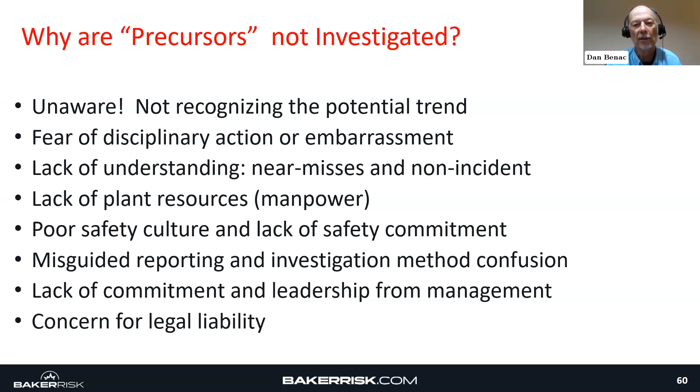It becomes also a plant culture thing, to develop that safety mentality that any kind of incident, although maybe minor, really requires investigation so that you can understand what is going on. We believe there's good value in that, even though there might be a small equipment failure - the end result is it prevents that ultimate event from occurring.

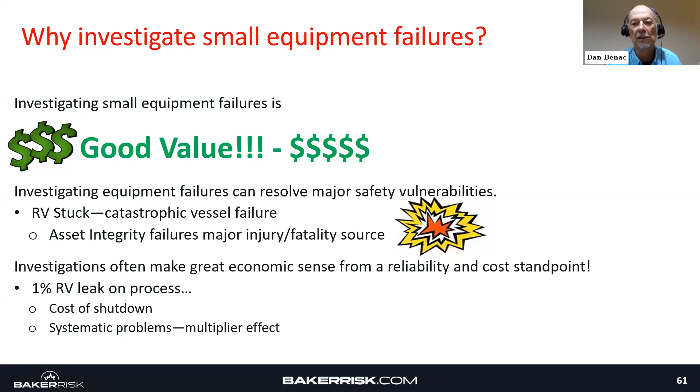I mentioned an RV, a relief valve, a pressure relief valve. We've been involved in a couple of incidents where the relief valve has been corroded, therefore stuck, and as a result of that, it doesn't do its job.

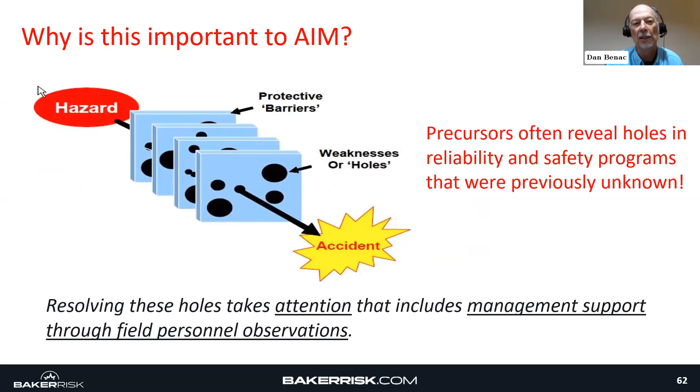Many of you are familiar with the Swiss cheese model. Looking at it this way, basically there's that hazard, and an accident could occur if these layers of protection are not in place. One of those layers is just looking at those precursors that will reveal the potential layers of protection - again, it's just another way of preventing that from happening.

So the final point we want you to take away is that a good asset integrity program is a must.

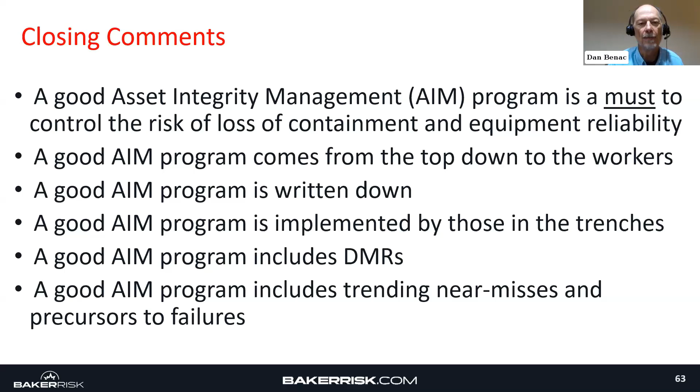If you're wanting to control your risks, we've gone over some of those elements. It starts from the top within not only your management, but your plant managers and your executives, and then it's implemented by those who are doing it day in and day out. It's a written down guidance. We believe two things are essential to a good asset integrity program: having a good damage mechanism review and trending some of those near misses or precursors. So that concludes our talk. There'll be some slides on some of our other capabilities, but for now I'm going to close and address any questions.

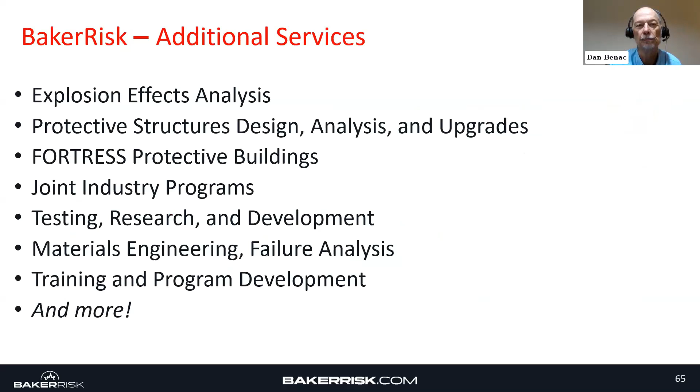Thank you so much, Dan.